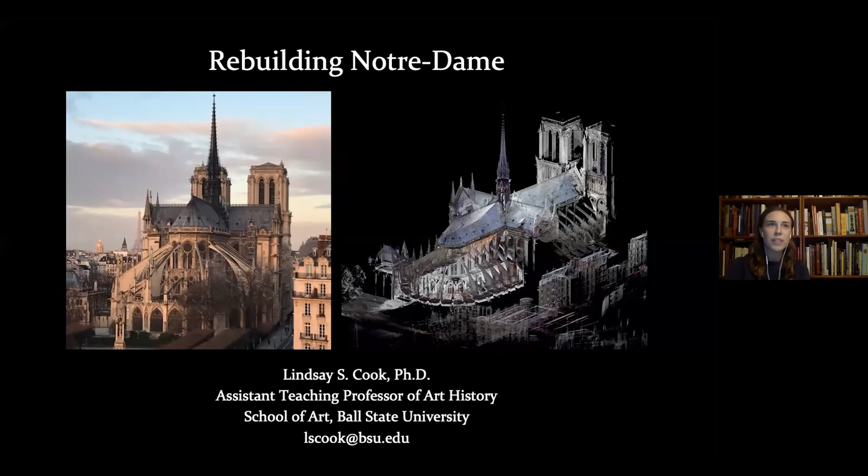Tonight I'll be discussing Notre Dame of Paris. Over the past decade, this building has really become the focus of my scholarly research. But I have to say to you all tonight, because I think we might share this in common, that I've loved this building since childhood, and I have incredibly fond memories of visiting Notre Dame over the years. So this is also a sort of labor of love, and that's part of why I'm here tonight. I'm really touched, as I said before, that you're all here.

A year and a half has elapsed since a catastrophic fire damaged Notre Dame of Paris, throwing its custodians and admirers like us for a loop and leaving the building in a fragile and fragmentary state without a roof or steeple. The fire made the restoration campaign already underway far more complex and exponentially more expensive. Yet it also set off a wave of philanthropic giving, which the project had previously struggled to attract. We can talk a bit about this at the end if you're interested in hearing some of the backstory behind the restoration already underway as of 2019.

About a decade before the fire, in 2010, with the financial backing of the producers of a documentary eventually broadcast on the European arts and culture television station Arte, as Cathedrals Unveiled—that's the English translation of the title—the late architectural historian Andrew Tallon, who was also my undergraduate mentor, produced a full laser scan of Notre Dame of Paris from pavement to spire.

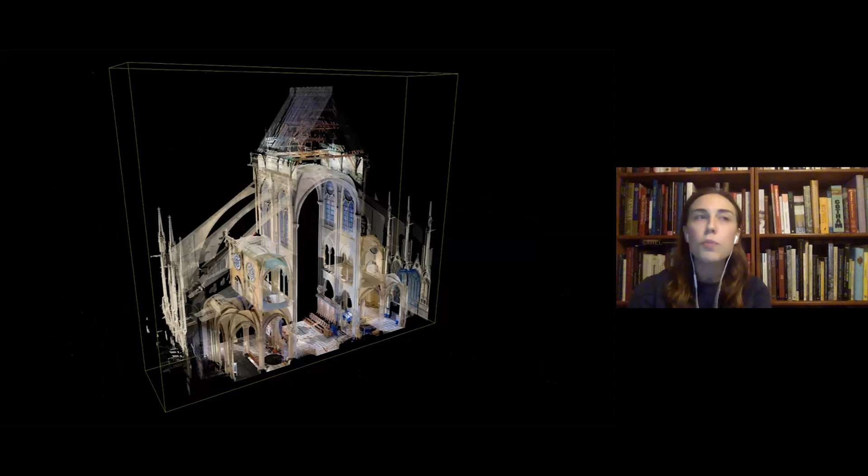The primary reason he wanted a laser scan of Notre Dame of Paris was to understand Gothic structure more fully and to pinpoint structural anomalies in the building's design.

So I'm showing you in this image a slice from the choir of the cathedral that's taken from the laser scan. For those of you familiar with various modes of architectural representation, you're able to make those kinds of renderings based on this data, which is a really useful tool.

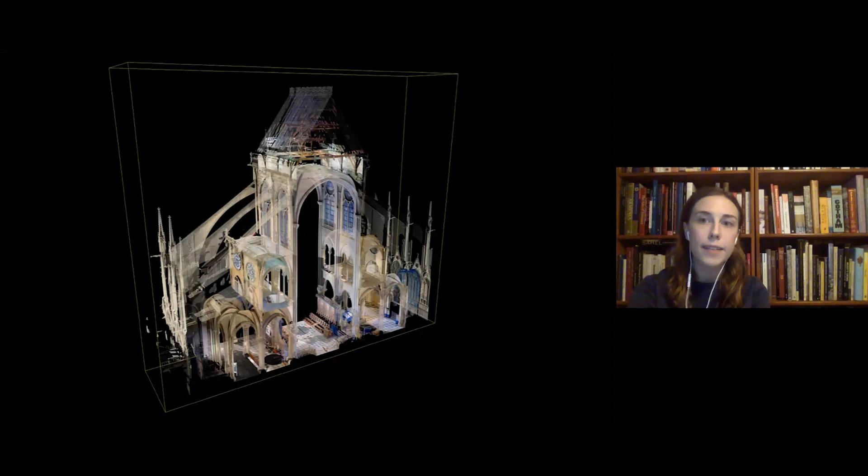To cite just one example of these structural anomalies that Andrew Tallon was interested in, the scan served as the basis for a new ground plan of the cathedral - what would be fair to call the first accurate plan of the building.

For generations, plans of Notre Dame published in the literature were straightened to appear more geometrically regular than the building actually is. In reality, the cathedral's ground plan is far more idiosyncratic, as we'll see in a moment.

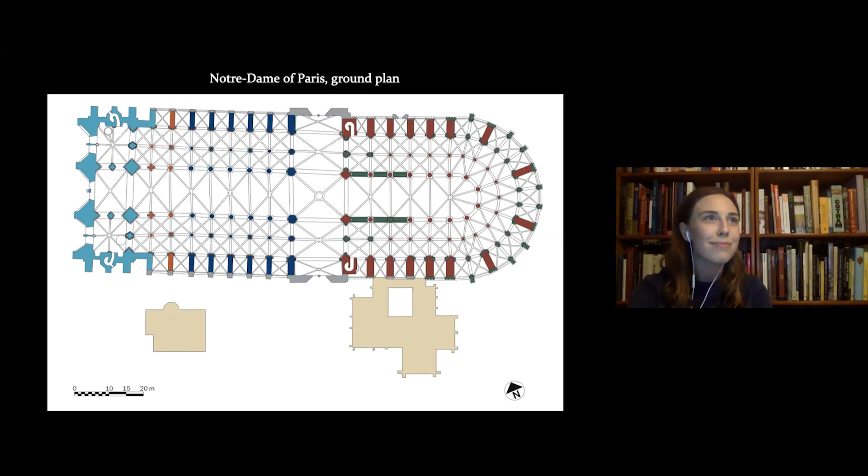The new plan and some of Andrew Tallon's other findings were published in the 2013 book he co-authored with Sorbonne University professor and researcher Dany Sandron. A new, slightly revised French edition of this book was published mere days after the 2019 fire. Because it had been published a few years before, there was new demand of course after the fire, and so a new edition was published in France.

And while living and teaching in Paris in the summer of 2019, I translated the 2019 edition of the original French language text into English. Penn State University Press recently published my translation under the title Notre Dame Cathedral, 9 Centuries of History.

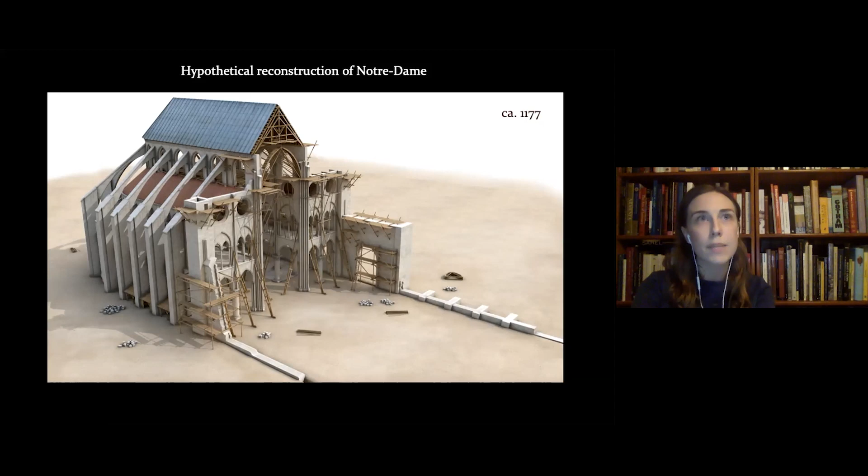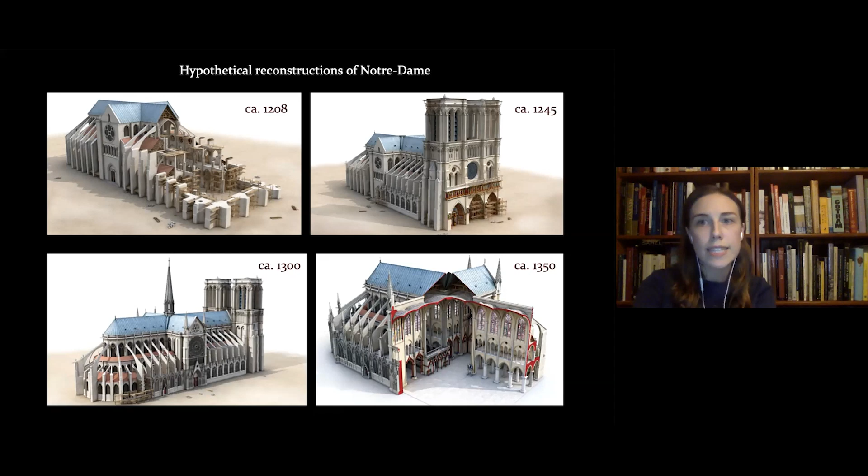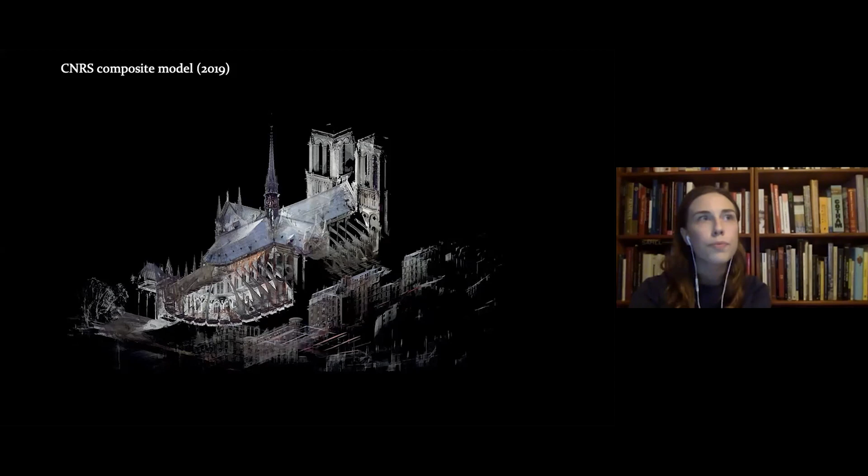The cathedral's damaged limestone vaults will most likely be repaired using limestone again, comparable to the original stone, but it will not be the same stone that you saw the workers pulling away and taking down and removing. All of that is being cataloged and studied—samples are being taken from those stones. But in some cases they've been damaged, and even if they haven't been, it's very unlikely they will be used in the restoration.

Instead, new limestone will need to be sourced from appropriate sources, and then the new stone will be placed here again. That said, this is certainly an approach that often happens in restoration practice in French churches, so it's not unusual. You'll be able to tell the difference—especially if you're an archaeologically inclined architectural historian, you'll notice that it's 21st century stone, not 13th century. But with that said, it's a common practice in restoration.

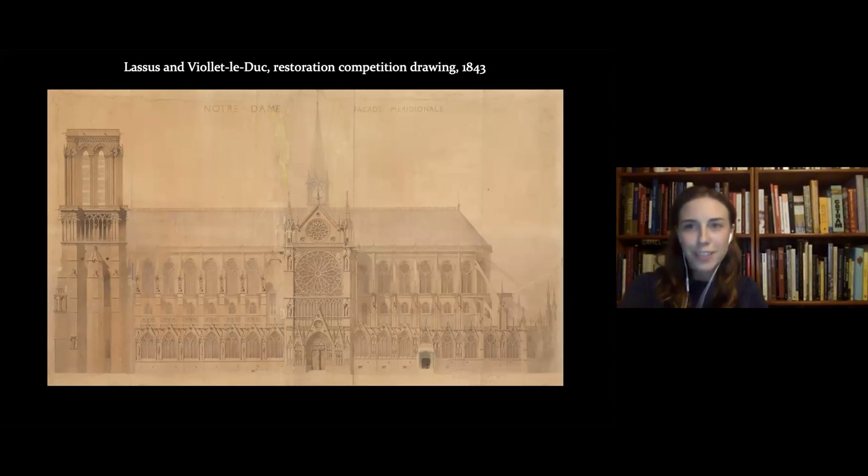However, in 1857, after Lassus's death, Viollet-le-Duc drastically revised the design of the spire. And so you see the new design here in this representation.

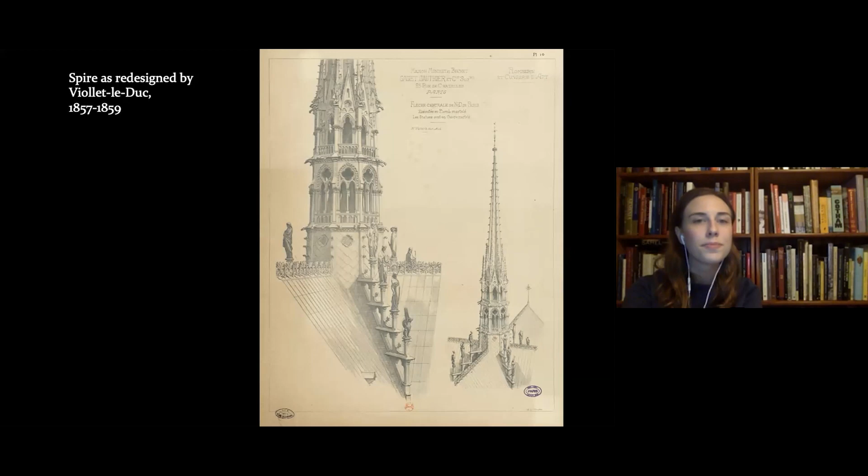Viollet-le-Duc also drew inspiration from the remnants of the base of the 13th century spire, which he studied before replacing it. He essentially brought that interior structure, the whole apparatus, outside for the layered base, where the statues of the apostles and evangelist symbols were then placed. So the overall structure, that kind of grid that you see, it's almost as if it was pulled from the interior to the exterior.

As I mentioned earlier, the Prime Minister announced shortly after the fire that there would be an international architectural design competition to determine what to do about the lost spire. Numerous architects and historians, however, subsequently vocally opposed that initiative, dismissing it as a beleaguered president's vanity project. I personally saw it a bit differently, as I think it was intended as an internationalist gesture in the midst of a project that might otherwise have become strictly national.